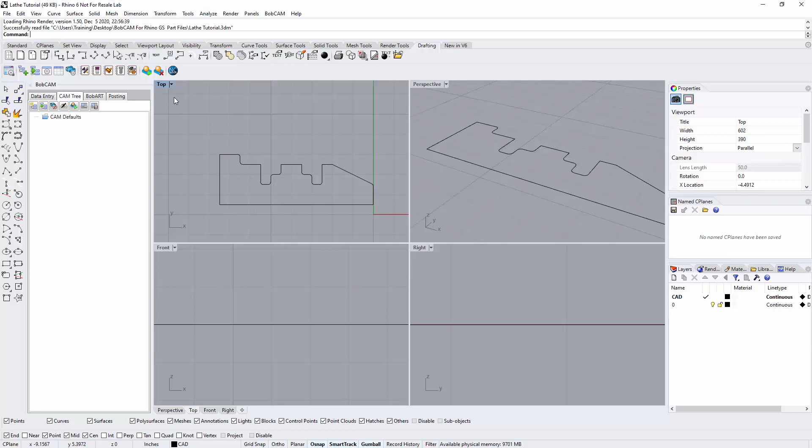The big thing is we really don't need perspective view, front, or right. So I'm just going to go to the top view so I can focus on just that view.

Now to get started, I'm going to right-click on CAM defaults here and go down to New Job, and then I'm going to choose Turning. When I choose Turning, it's going to give me a lathe, and you may have more than one lathe available. I'm going to use this BC2X lathe, but really all the lathes are the same. The most important thing is that you have the right post processor for your lathe. So you can use the BC2X lathe with a Haas post or an Okuma or whatever you got. You can actually use them together and it'll work out just fine.

Now from here, I'm going to go right into the stock wizard. I can pick my geometry if I had a solid model for my workpiece, but I don't have a solid model, so I'm just going to ignore that and go past it.

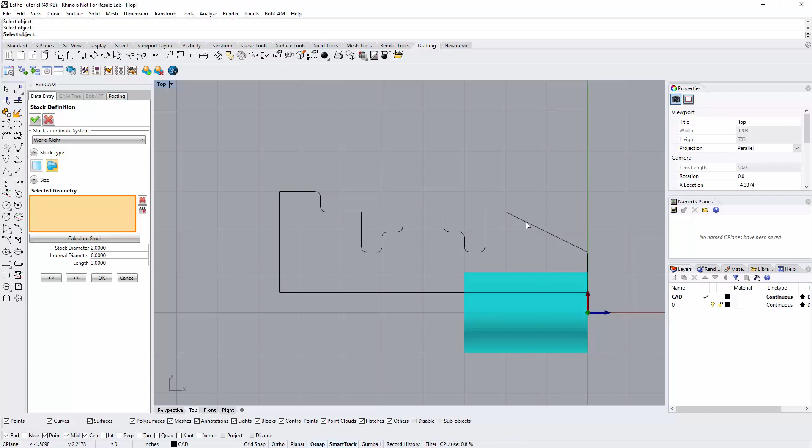And then right here, I create my stock. Now we have two types of stock that we can select when we're doing a turning job: cylindrical stock, or revolved stock, which means I go in and actually pick geometry and tell it to revolve that stock.

Now in this case, I'm going to go with a cylindrical piece of stock, and I'm going to define it to the size of a stock diameter that is 6 inches. We have an internal diameter at 0 because I don't have a hole through the stock. The total length of it's going to be 8 inches.

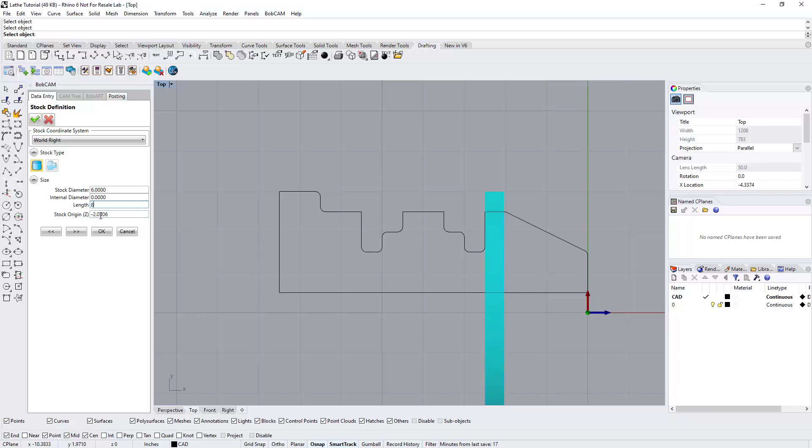And because I used the revolve a second ago, it's thinking that the front face of the part is here. So I'm going to set my stock origin at just 0.1. This is going to leave me some geometry in front of the material that I'm going to be able to face off with a quick face pass.

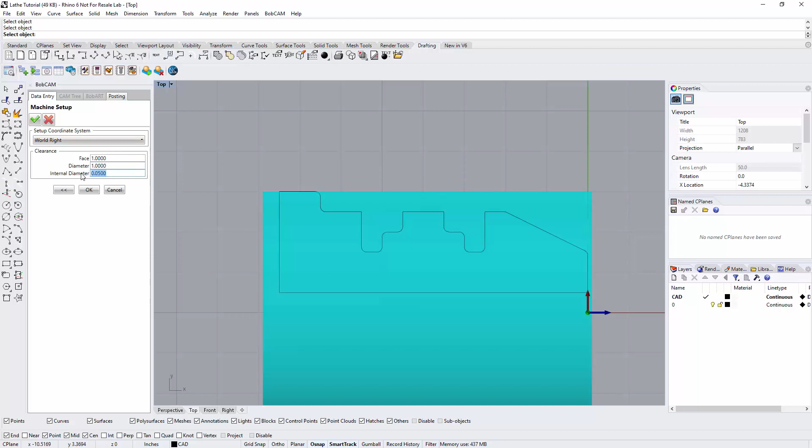Now when I hit next, I then have my clearance planes. There's no other origin. The origin defaults to right here. So I have my face at 1 inch, so it's going to stay 1 inch in front of the part when we wrap it around. It's going to stay 1 inch off the diameter. And then if I had an ID, it would be at 50 thou. But in my case, I'll just hit OK.

And then I'm going to go ahead and blank out my stock. Now, before I start toolpathing this, I want to go in and load in the tool crib because I have a couple tools in here that are kind of custom made. They're a little bit longer to be able to do some of these grooves.

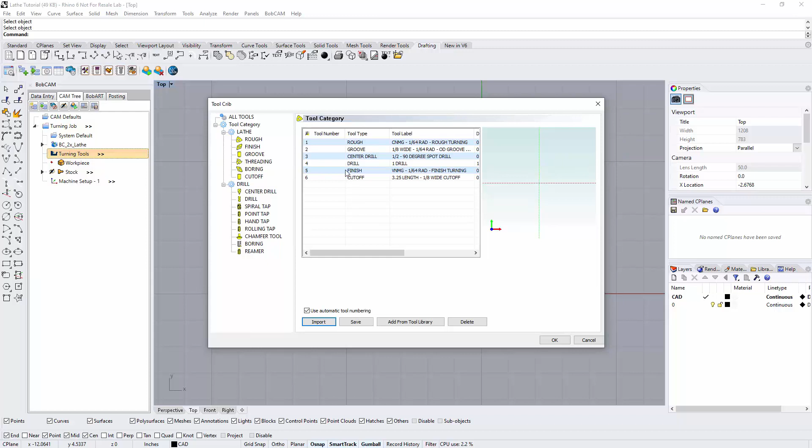So I'm just going to right click on turning tools and say tool crib. And then down here, I'm going to import my tool crib from right here, the lathe tool crib, LAT cribs is what it's called. So we'll say open. And then there's the 6 tools I plan on running. And the big thing I changed here is on my grooving tool, we have it sticking out a little bit further to be able to go in and make those cuts. So I'll go ahead and hit OK.

And then I'm going to right click on machine setup 1 and do a lathe end face. So from here, I'll just select my geometry. Really, I don't actually have to pick geometry, but I'm just going to pick the front line right there, just that front face line, and then hit OK.

And then go next. Now, if it tries to pick the full chain, remember you can go into the sub-entity picking by holding Control and Shift at the same time.

In this case, I have it not joined together, so it didn't ruin anything. Right here I have my rapid plane, so it's going to be 200 thousandths in front of the front face of the part. It's a front face type cut for the feature, and I'm doing region 1. If you go region 2, you're going to start from the center and move away. I want to start from the OD and move to the ID.

Right here I could tell it whether to go from a stock amount. So what's the stock? Do we want it to read the stock and cut it, or do we want to just go with a custom amount where I can define that? And then right here we have some extensions, so how far above the part do I want to start?

I'll give it a little 1/8 inch there. And then how far past center do we want to go? I'll give it a 1/16 of an inch right there, so just 0.0625. That should give us enough to get rid of the little tit that's going to be left at the tip of the part.

So right here I'll say next. Right here's my machining strategy, and the strategy for this is either an end face rough or an end face rough with a finish pass. The finish pass would just be used to clean up any excess. I'm not going to do a finish pass, I'll just go with the end face rough.

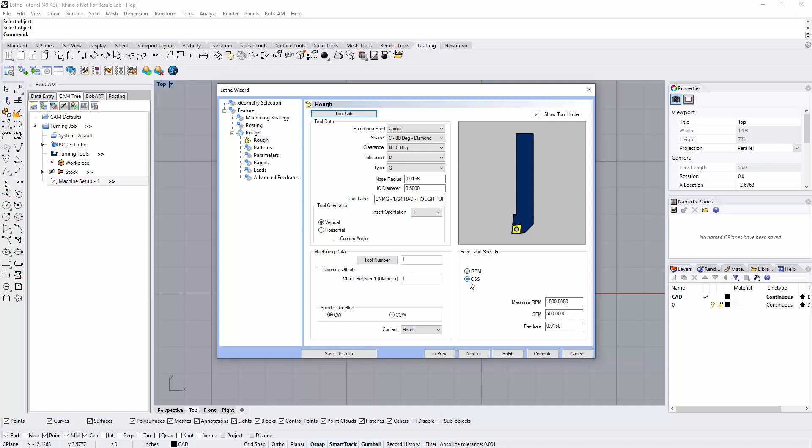I do choose between clockwise or counterclockwise. I have my coolant of flood, mist, air, oil, or off. And then right here for feeds and speeds, we could either set it up with an RPM or a constant surface speed. So I'm going to leave it on constant surface speed and then hit next.

Right here's my pattern, so how do I cut this part? Either I do a standard cut, and we just start at the beginning of the cut. In this case it's a face, so it's just going to cut its way down, go back, cut again.

We could also do a zigzag with that option, so it actually zigs its way in. Not something I've used much on really anything, but especially not facing.

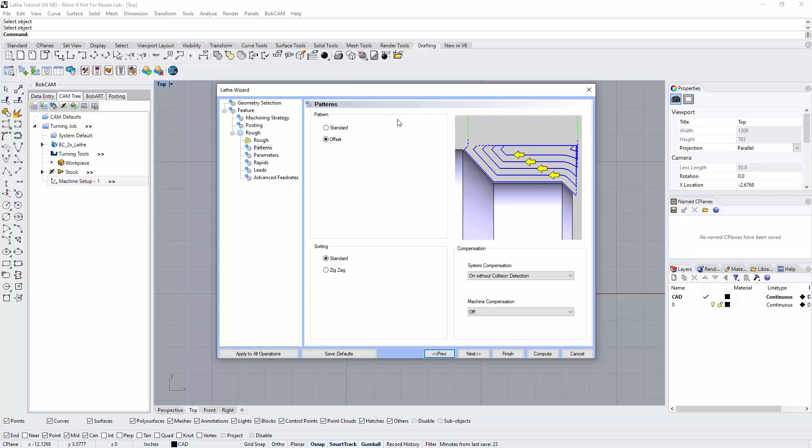And then the other option is offset, so we basically follow the shape of the geometry as we cut the geometry out. I'm going to go with a pretty standard one and just say standard with a standard sort.

And then right here we have our compensation. Now, if you're defining your tools properly and you're defining the correct holder, you can go in and say on with collision detection, use the tool holder. This will ensure that we don't drag the holder across an area on the part that can't be cut with that holder.

If you're not using the on-with-collision-detection option using the tool holder, you're primarily going to be using a G41 or G42 so that you can offset your tool manually. For me, it's pretty much always going to be on with collision detection using the tool holder.

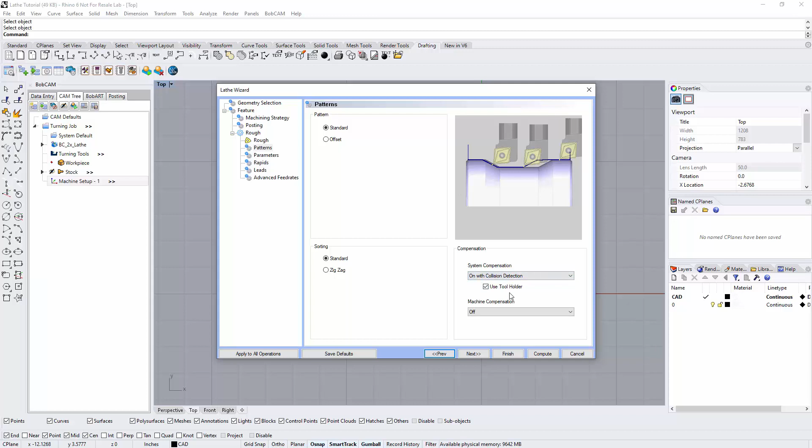Next, I have my parameters. How much am I taking off in my depth of cut? How much am I leaving for my allowance? For my depth of cut, I'll say 50 thou, but I don't want to leave any allowance. So I'm going to put these both at 0 so that with this one rough pass, I can finish the entire front face. Here we have options for overlapping, which don't really come into facing too much.

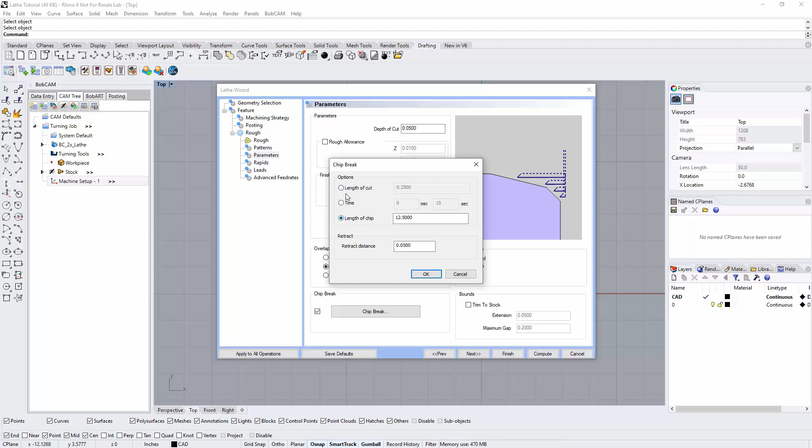These will pop up more when we get into the turn rough and turn finish. So I'm just going to leave it on no overlap. Here we have our chip break options, where we could tell it our length of cut before the chip break, tell it the time, or tell it the length of the chip, and it's just going to retract the tool and break the chip. So I'm not going to do any chip breaking right now.

We have our corner types here, which again a lot of these options you get in both face, but you'll also get them inside the turning. So when we're actually roughing the OD, these will come in handy more than with a face cut, but you can choose whether you want a round interpolation of your corner or a sharp interpolation of your corner. I'm going to go ahead and leave it on round.

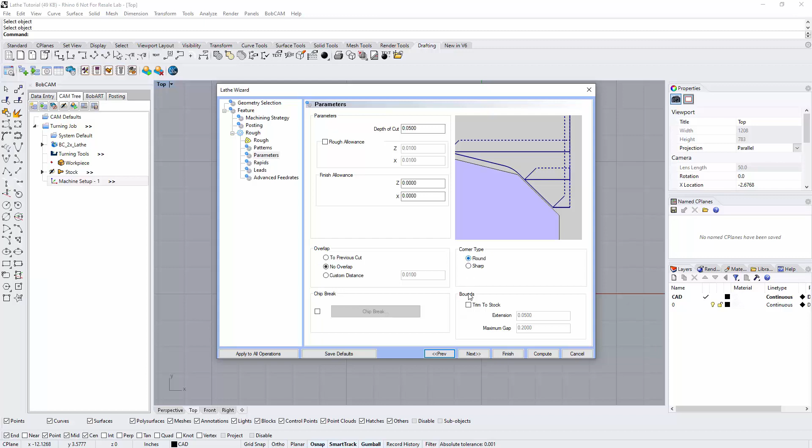There's also an option for trim to stock, and this is helpful if you've already roughed some material out and you don't want the tool path to go into areas that have already been cut. You can create a model that represents what's been cut and what hasn't, and use it as a trim to stock option. But in my case, this is the first cut we're doing, so I'll go next.

Here's our rapids. You have a default rapid on your approach, which is primarily what I use, especially with a part like this where it's all pretty much OD work. I'll just say use a default rapid on the approach and a default rapid on the exit.

But you do have different situations. You could say I want to start from the OD, ID, or face clearances, or you can rapid from a defined point. When you see values that say X-Z, it means X then Z is going to move, or Z then X. But with ones that don't have a dash, it's an angle there, so it's just going to be an angle straight in. So if you can't do that, don't do that.

Like I said, with most approaches, the default rapid on the approach works pretty good. The default rapid on exit is kind of the same thing—you're just going to tell it where to go. So you set up a tool home, a cycle start, or a defined point. Again, same thing with X-Z meaning X then Z. You really have to be careful with that when you're doing ID cuts, to make sure you don't take off in the X direction and run through your part before coming out.

So just make sure, most of the time, try and start it with the default rapid on exit, set your home position, and hit compute. If you see a problem, then go and change it. But most of the time the defaults do a pretty good job.

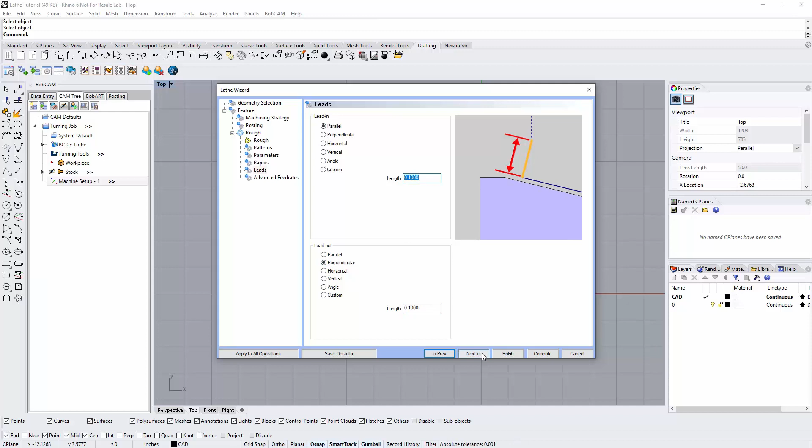Finally, we get to the advanced feeds, and this is where we can convert rapids to feeds, meaning we take G00s out of the program and replace them with G01 moves, and that's going to allow us to output a feed rate for when we're doing those G01 moves.

So it's to help with an issue called dogleg rapiding. If you've heard of it before, you may need it, but most of the time you're pretty safe. Right here you have percentages of your feed rate being used when you're doing a lead in or a lead out. When we're all done and can't hit next, we'll just hit compute and let it calculate.

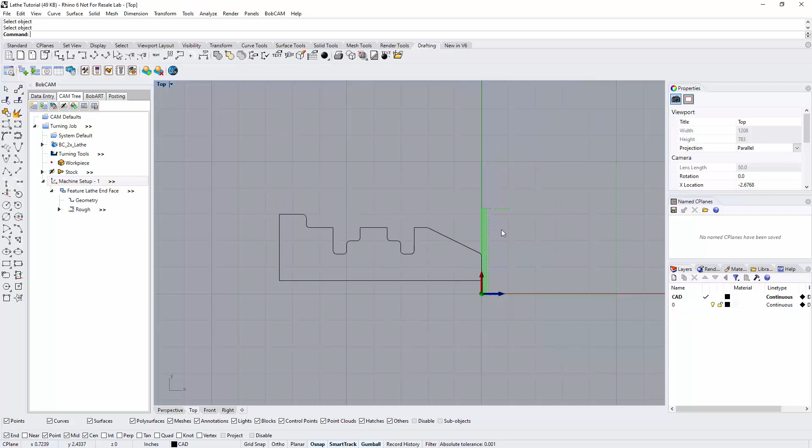And there is our toolpath right there, our front face path. So now I'm just going to right click on my feature lathe end face and say blank unblank toolpath. And then I'm going to go ahead and move on to the hole down the center.

I'm going to drill the hole out of the center first. So I'm just going to right click on machine setup 1. I'm going to go to lathe hole. And then I can go and select my geometry.

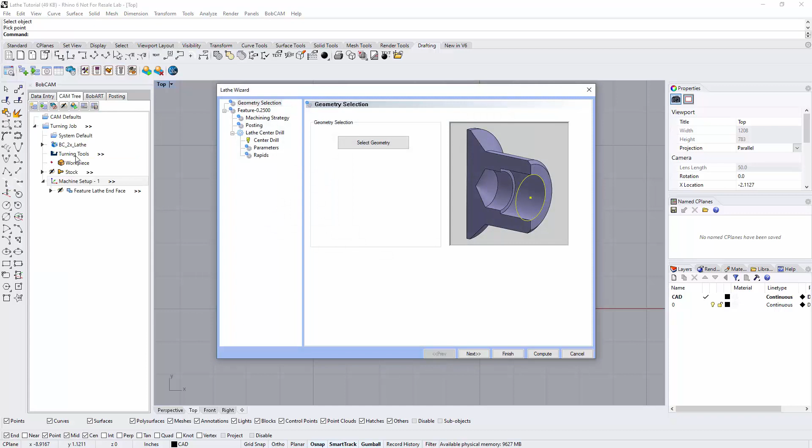So when I say select geometry, all I need to really define is where the drill is going to drill to. So I'm going to pick this back point of this line right here and then hit OK. And I can actually adjust that as I do this. It's a lathe drill, so it can only go right down the center. So I'll go ahead and say next.

Right here we have our feature, so we're going to have to define all of this. We have our clearance plane in front of the part, so 1 inch. Our rapid plane, I'm fine with 200 thousandths. Feed plane, 100 thousandths, I'm good with that.

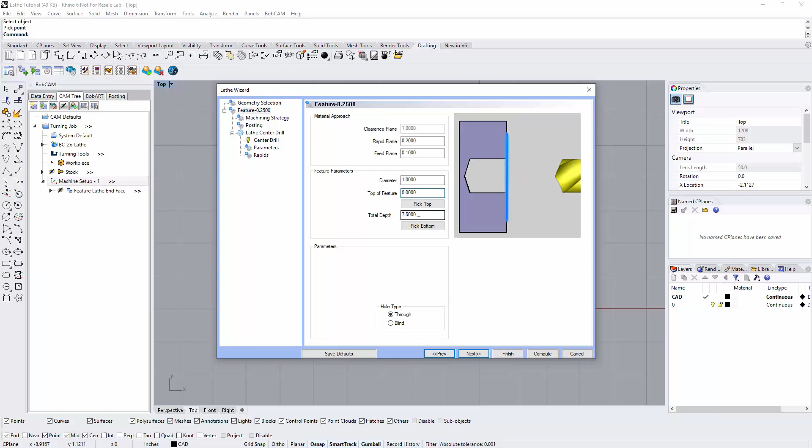The diameter of the cut is 1 inch. The top of feature is at 0. The total depth that it's going to go is 7.5 inches. And then right now I have it set up as a through hole, so it's going to add 50 thousandths onto this 7.5. So it'll be 7.55 by the end of this.

Next, I then have my machining strategy. I'll choose the lathe holes feature, which will give me a center drill and a drill. Next, again, I have my posting, so we could do separate moves or canned cycles, all depending on what your machine has and what your post has had worked out. And then right here, I have my center drill.

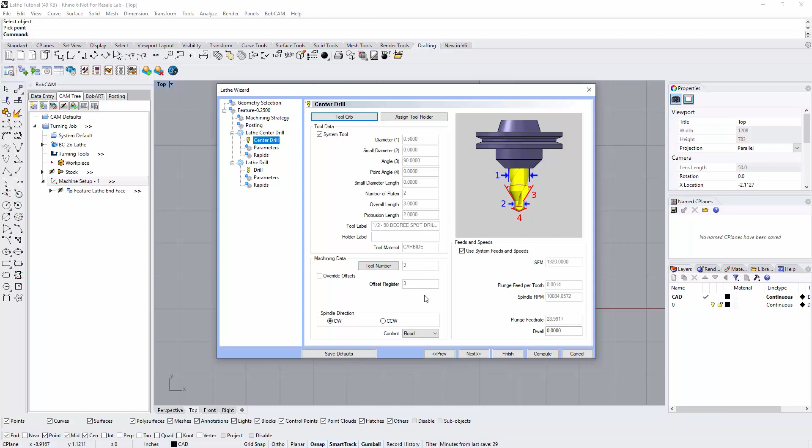It's a 1/2 inch, 90-degree spot drill. It's part of my tool crib. So I'll go next again. Right here for the parameters, we get to set up our depth of cut and our center diameter. So I'm just going to set this to 0.2 for the diameter, so it goes 100 thousandths deep. And then I'll just tell it to do that with a single step.

Next, I have my rapids. Again, I'm going to use the default rapid on both the approach and the exit because most of the time when we're doing OD kind of cuts, exterior cuts, we really don't have to worry about that. So we'll go next again. For the drill, I have my 1 inch drill. And so I'll say next again.

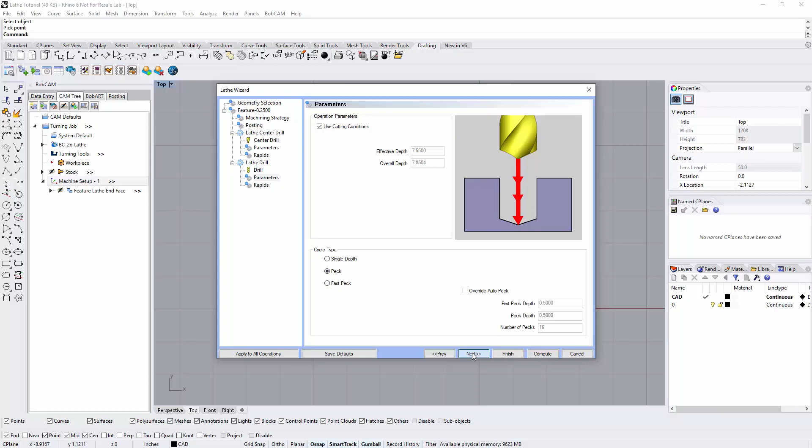Right here, we'll see that the overall depth is 7.8504, and you'll see that the effective depth where we're getting the full cut is going to be that 7.55, that added 50 thousandths. Now I am going to go ahead and peck this one out, and I'll just say next again. And right here we have our rapids, so I'm going to use my default rapid approach and my default rapid on exit. So I'm going to hit compute, and there is my drill down the center of the job there. So then I can blank that one out as well.

The next step is going to be turning from the front radius here all the way to the back of the part. So I'm going to right click on machine setup 1, and I'm going to go down to lathe turning. From here, I'll say select geometry.

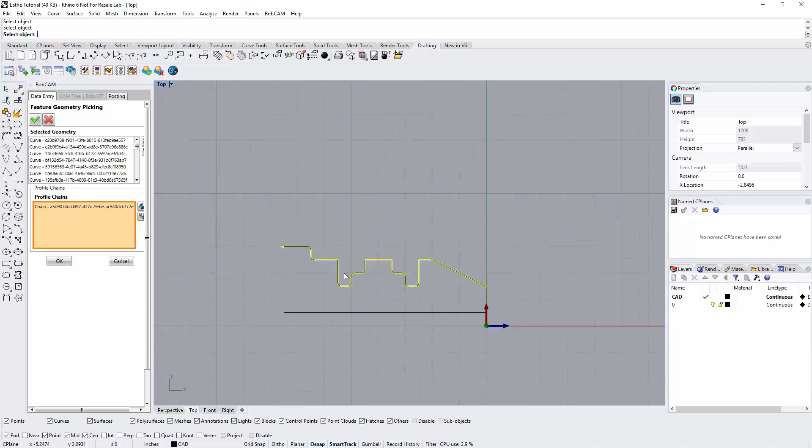And I'm just going to drag a box over all of this geometry right here so it grabs it. Whatever you can select inside the box will get grabbed. And then I'm just going to add in the extra pieces right here just by clicking on them. And then right here, I could click on my chain and we can see it's going to start at the front face here and go back to the back edge. So that's perfect. I'll then hit OK. Now, after hitting OK, I could just go next.

And then right here we have our rapid plane, so we're going to be 200 thousandths above the OD when we wrap it around. We're telling it that it's an OD cut and that we're using region 1, so basically we're starting at the front face and moving backwards. If we go to region 2, it's going to do the back face towards the front. You also have a choice of doing ID cuts. Really what this feature type is doing is it's prepping the tool and the orientation of the tool so that it comes out properly. So I'm going to go OD region 1.

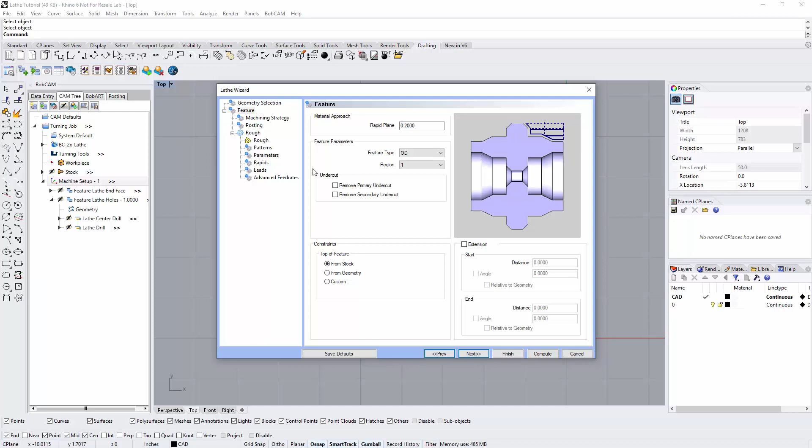And then right here I have some undercuts. Now grooves inside of your turning are seen as undercuts. Primary undercuts are turn grooves, secondary undercuts are face grooves. What these buttons do is they allow us to ignore or remove the geometry that represents the groove. So it takes that out of the geometry, so I don't have to worry about those, or I don't have to worry about adding a line across them to ignore those. So I'm going to say remove both of them. I don't have any secondary or face undercuts, but by turning it on, I'm just ensuring it doesn't run there.

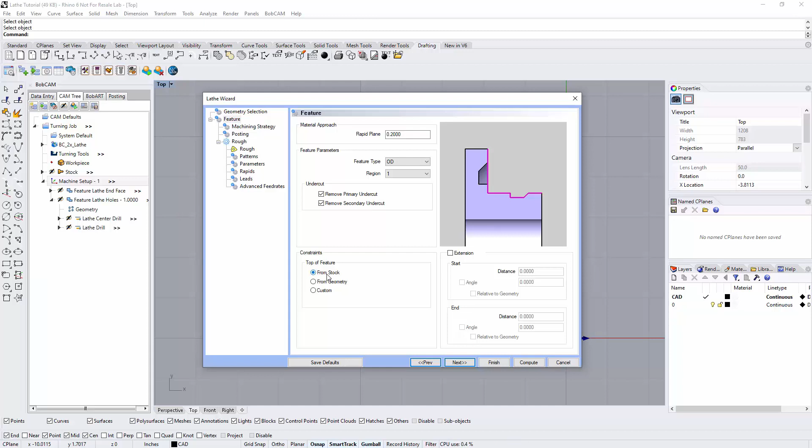And then right here I can tell it where to machine from, so I want to start from the stock, move to the center. So I'll say start from the stock. And then for the extensions, whether or not I add them, I don't think I need them. I'm also going to have a leads page here, so I could add leads to take care of that. But the extensions just allow me to extend either before or after the part when we run it. So I'll go ahead and say next.

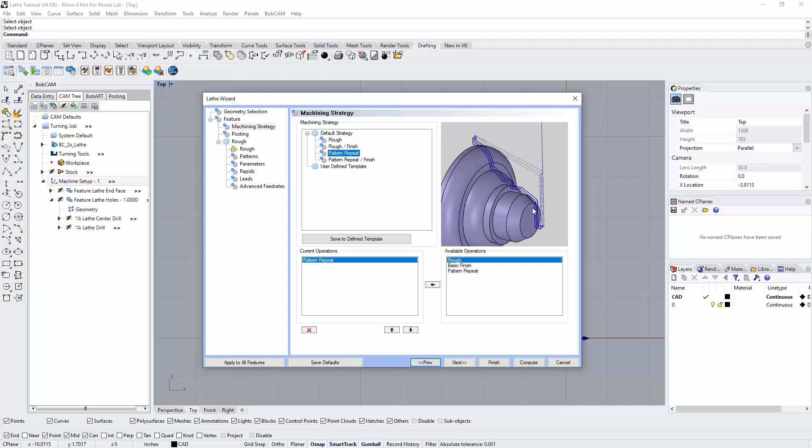Right here's our machining strategy. So we have the choice of doing a rough and a finish, a pattern repeat, or a pattern repeat with a finish pass. I'm going to go with the rough and a finish, but the pattern repeat is essentially just a series of cuts that match the geometry and just kind of step their way in for a finish pass. But I'm going to go with the rough finish here and then go next.

Right here, again, we have our separate moves or canned cycles. I'm going to go with separate moves. And right here we have our roughing tool, so it's a CNMG, the same tool I used when I faced off the part earlier. So I'll just leave it there and say next.

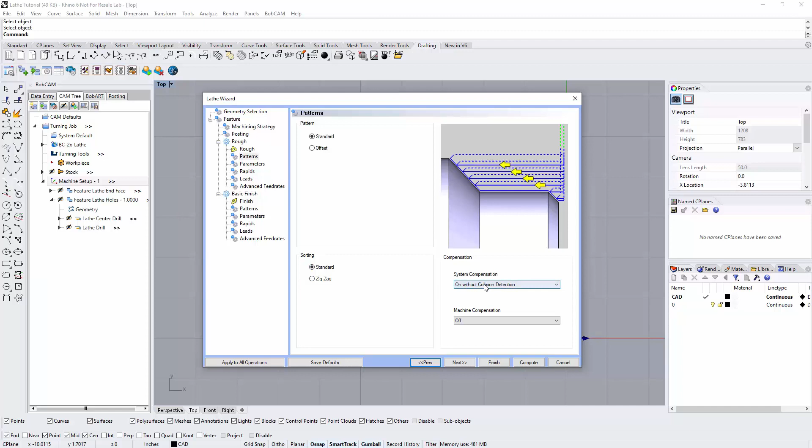Once again, it's the same options we saw with the facing pass for the pattern, so we could go with a standard or an offset, and then we could choose either a standard or a zigzag pattern when we go to machine it. You need the right tooling to be able to do this because you're going to be doing a back drag cut when you're doing your return. So I'm not going to do a zigzag, I'm going to go with standard. And then right here for my compensation, I'm going to turn on with collision detection using the tool holder.

Next again. Right here we have our depth of cut, and I'll leave that at 50 thousandths. I'm actually good with it taking that much. But this time we do have a finish pass, so I am going to leave some finish allowance on that part. The rough allowance is kind of an intermediate one. If you were to rough it out and then use some pattern repeats and then a finish pass, you can group them all together. But in this case, I want to rough it, I want to finish it.

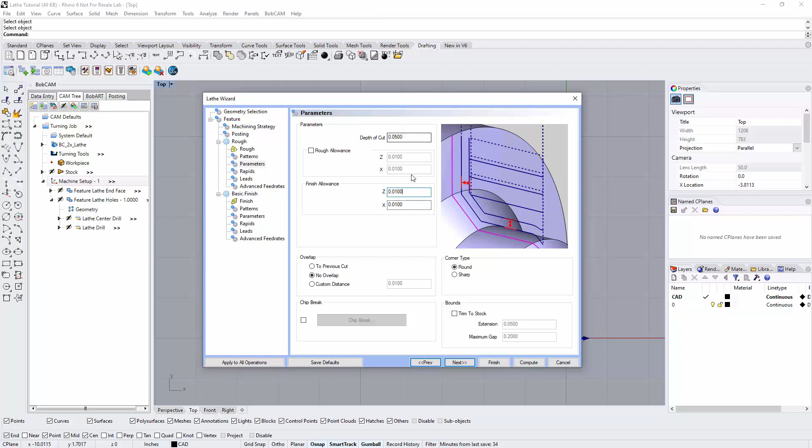And right down here we have our overlaps. So no overlap means that when it gets to its cut, it ends and goes back to the beginning. If you set it up to previous cut, what it'll do is as it leads out, instead of just leading straight out, it actually connects to the previous cut and then leads out, and it just helps smooth the part out as it runs. You could also set up a custom distance that you want it to go instead of going to the previous cut, but I'm going to go to the previous cut.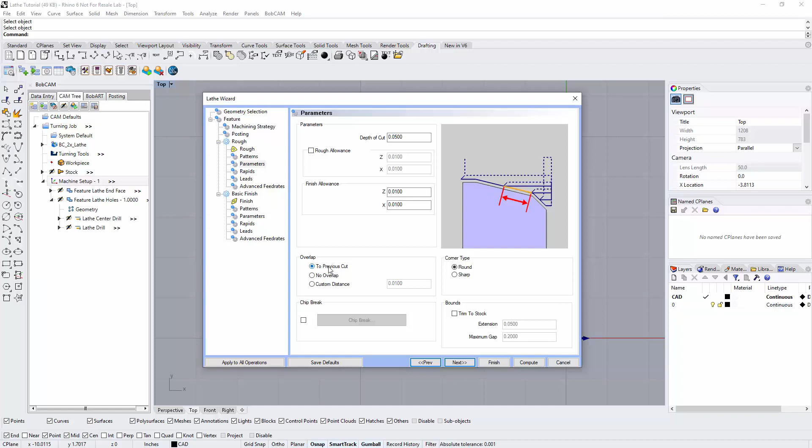I'm not going to mess with any chip breaking on this one. And then right here we have our corner types, either round or sharp. Again, that's just the interpolation of the geometry when you make the cut. And then we have our trim to stock option there.

Next, we then have our rapids. So the rapids, we have a default rapid on the approach and a default rapid on exit. I'm good with that, so I'll go next again.

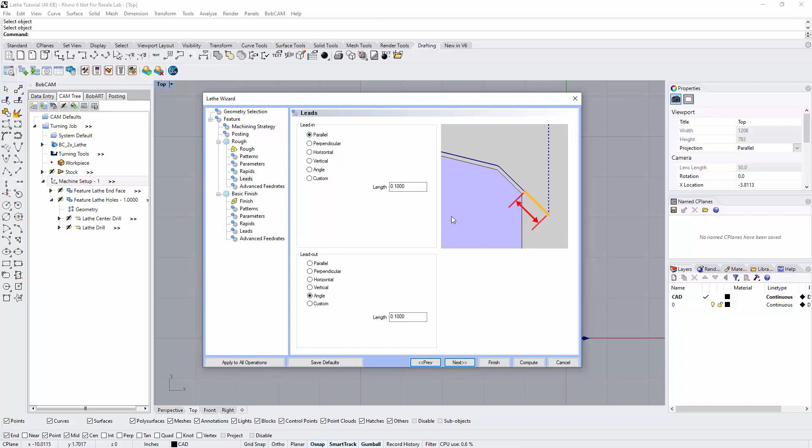Leads, I'll start with a parallel lead in, so it's parallel to where we're cutting, and then just start with an angled lead out. Again, I like to change as little as possible, so if these are potential working options, then I'm going to leave them. Because if they work, I don't have to worry about changing them. If they don't work, I got to change them. So for now, I'll leave those there as the defaults.

Right here's my advanced feed, so I can convert my rapids to feeds and then change my lead in and lead out feed rate percentages. Essentially, this is the same exact toolpath as what we would have seen when we set up the facing pass. It's just the facing was oriented to cut the face. This one knows to cut the turn. So I'll go next right here.

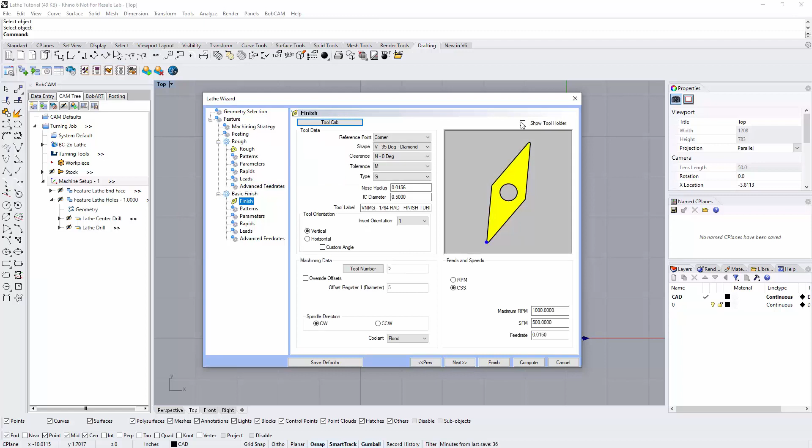Here's our finish tool. It is a VNMG. Again, this is one that I set up inside the tool crib. So I'll go ahead and say next.

For the patterns on this one, we could either do a continuous cut where we start from the front face and just go all the way back, or we could do an alternate cut where we face the vertical areas only, we turn the diameters only, or we do both. So we turn the diameters and we do a face for the verticals, so it's going to cut it down. But I'm going to go with just continuous and say on with collision detection using the tool holder.

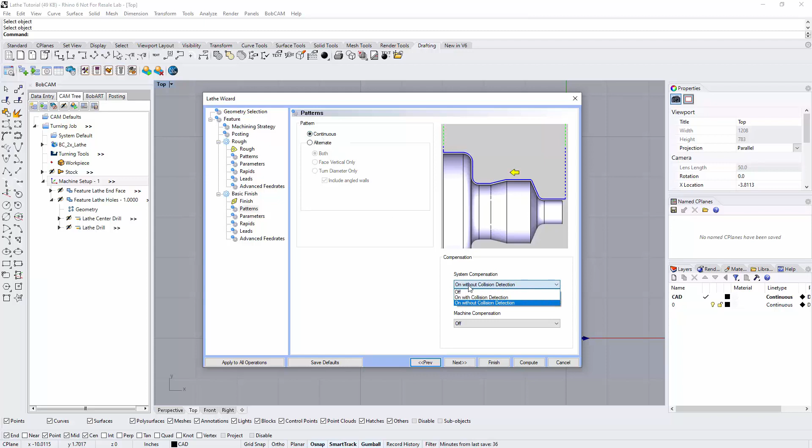Next again, we have our parameters, no allowance because this is a finish pass. Next again, we're not going to change the rapids. Again, use the default leads if we can. And finally, we have our advanced feed rates. And when we can't hit next anymore, we hit compute.

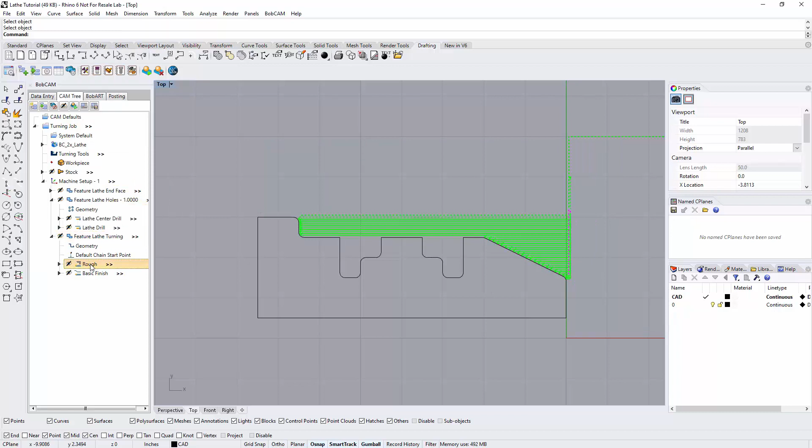Now, after the toolpath finishes calculating, what I like to do is blank it out. So I can blank the whole thing out, and then I could go in and see the actual toolpath. Here's all the roughing, and here's my basic finish right there. So it's taking it all down. We'll see it's ignoring those grooves completely. And then I'm just going to go ahead and shrink this up.

So the next thing we're going to do is these two grooves that we have right in here, and then a cutoff. So I'll right-click on Machine Setup 1. I'm going to go down to Lathe Groove, and then I'm going to select my geometry.

Now the geometry for this is just going to be all of the lines for that. So I'm going to drag a box over pretty much everything right here, and then I'm going to deselect the things I don't want. So that and that. From here, I just look at my chains, make sure they're going from start to finish, from the front face back, and that's fine. And then I'll hit OK.

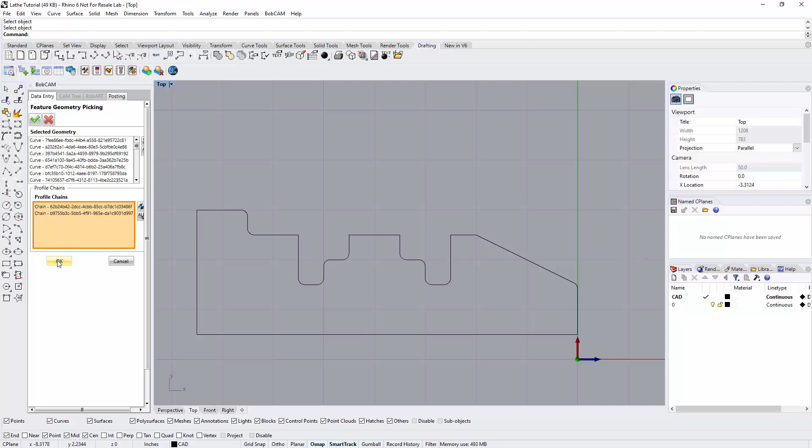Go next again. Right here we have our choices. So I have my rapid plane, my feature type, whether it's an OD or ID groove, whether I'm doing region 1 or region 2, so kind of depending on where I'm coming from, how it's orienting the tool. If I have angled grooves on here, I can have a tool that matches the angle, and I can actually set it to rotate that angle.

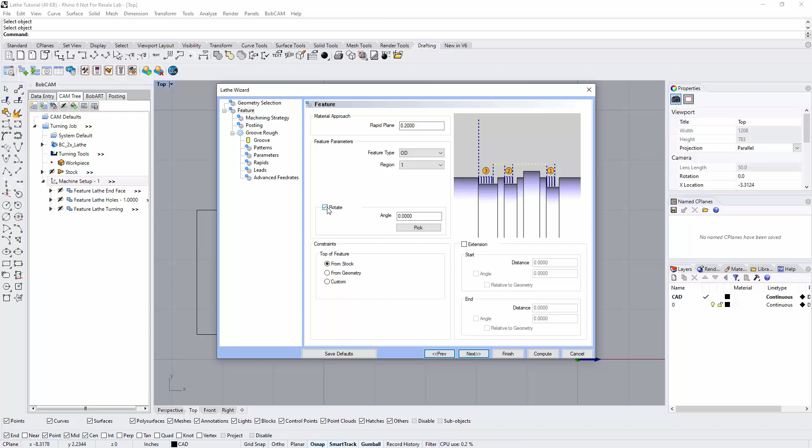And then right here we have our constraints. So I could say go from the stock, so it's going to go from where the stock was, but you got to think we've removed all that stock now. We could say go from geometry, which is from the top of the geometry, from the highest point in, or we could set up custom. So I'm going to say from geometry, no extensions, next.

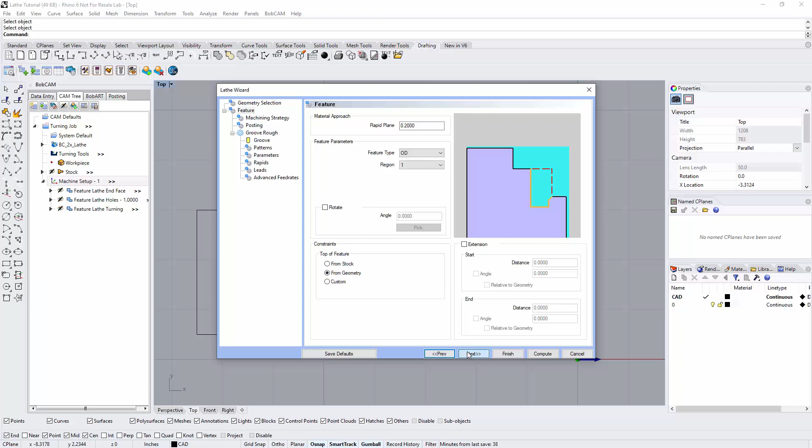Right here we choose a groove, rough, and a finish. I'm going to use the same tool, but I want both of them. So I'll go next. Separate moves or canned cycles, and then the groove. So this is my grooving tool, and I'm hoping this is long enough. I may need to adjust the stick out on this tool, which we can handle after this. We'll see what the results look like.

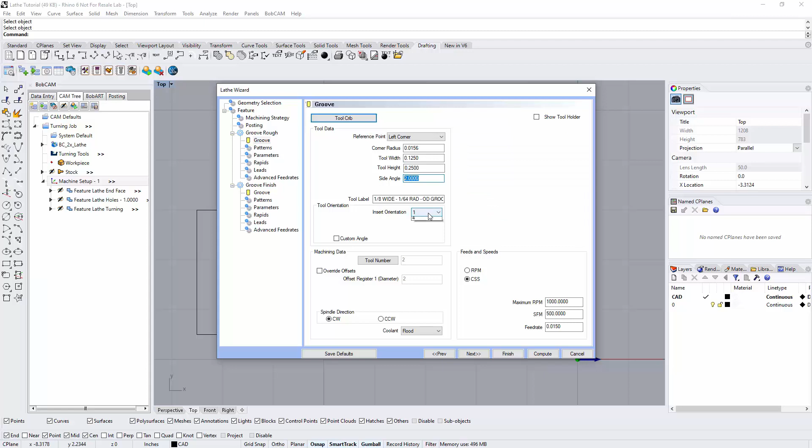But we have our left corner for our reference point, and that's referencing everything off there. We have our corner radius, tool width, tool height, side angle, tool label there. The insert orientation, again, just the orientation of how that holder is sitting. We could set up a custom angle. We've got our tool number, spindle direction, and feeds and speeds.

So when we get into the groove patterns, we have 3 patterns, either a standard pattern, and with standard, you get a choice of sorting either standard, so you just go in order, 1, 2, 3, 4, 5. You could go from the center out, so you do half of it and then come back and cut the other half. We can alternate that, or we can actually skip - so we cut one, skip an area, cut the next, skip an area, cut the next, and then go back and clean up the areas we skipped.

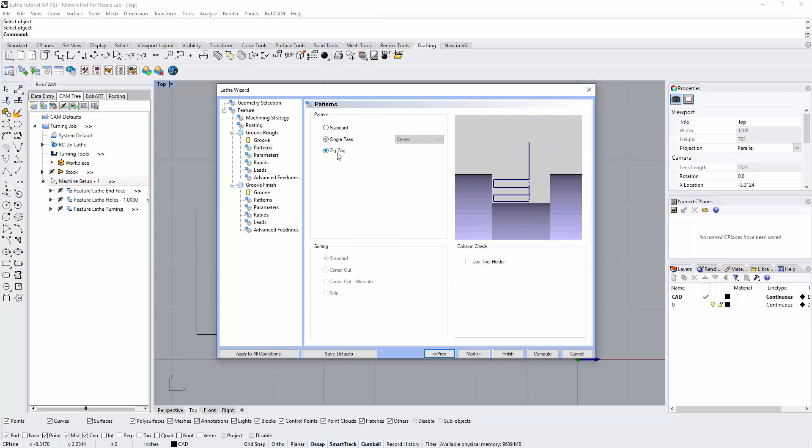We could also do single passes, so that's just if I have a tool that fits a groove, I would just want to press it in and come back out, and we want to base it on either the beginning, the end, or the center of the insert. Or you can cut it with a zigzag, so actually zigzag your way down to the floor.

But I'm going to go with standard. I want to use the tool holder for my collision checking, and this is really helpful for if this holder is too short - it's going to not let it cut into the areas that I'm trying to get into. So it should be able to protect us a little bit in case I didn't change the tool to the correct length. Right here for my parameters, I have my step over amount.

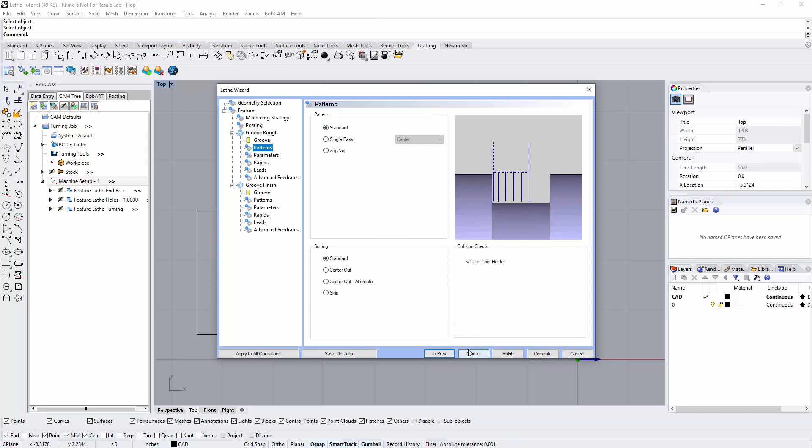So I'm using an 1/8 inch wide tool. I'll just leave it at 50 thou, but really a 1/16 of an inch would probably be fine. The allowance we're leaving for the finish pass, and whether or not we're taking this out in multiple depths - so you can actually step your way in. I'm going to leave it as just depth of cut, no multiple depths. I just wanted to cut to the bottom.

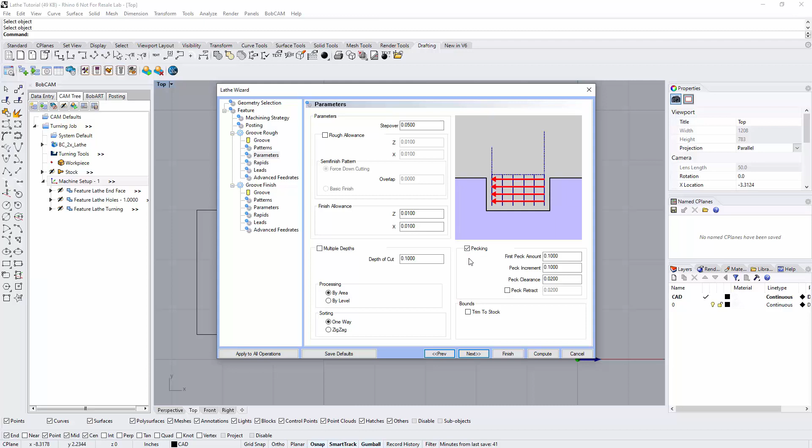We'll process by area. We'll do a one-way sort. And I'm not going to peck, but we can peck by setting up our first peck amount, our peck increment, and our peck clearance, as well as a retract if we want it. And then we do have that trim to stock option, so it knows where the geometry is.

Right here for our rapids, again, it's an OD cut. I'm going to use the defaults. Same with the leads - I really only have one option, which is parallel, so I'll leave that there. And then our advanced feeds - we can convert our rapids to feeds. We also have our lead in and lead out feed rate percentages.

Finally, we get to the groove finish. Should be the same tool - it's tool number 2. That's all good, so I'll go next.

The pattern on this one is force down cutting, so we have everything kind of meeting in the middle of the cut here, plunging in from both sides and cleaning up the groove from both sides. You could even add an overlap amount, or you could do just a basic finish - start on one side and just feed through. So with force down cutting, I'll leave the overlap at 0.

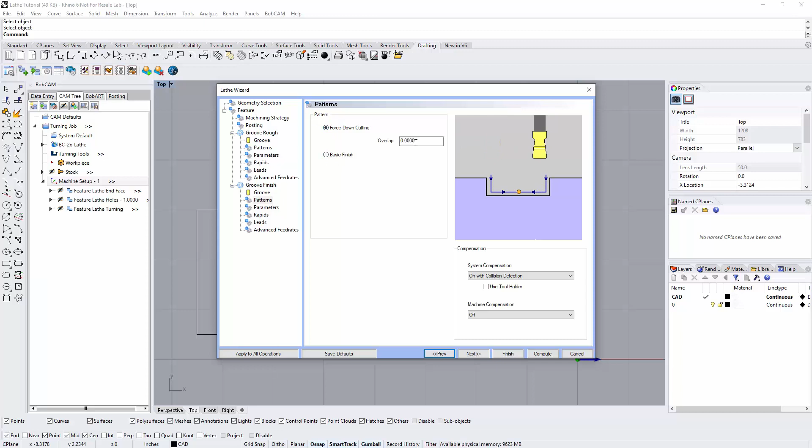On with collision detection, it's one of 2 options in this one. We don't have the 'on without collision detection' like we have when we're turning. We'll just say use the tool holder. Parameters, zeroed out for the finish pass, no chip break, nothing else. Right there we have our rapids, our leads, and the advanced feeds.

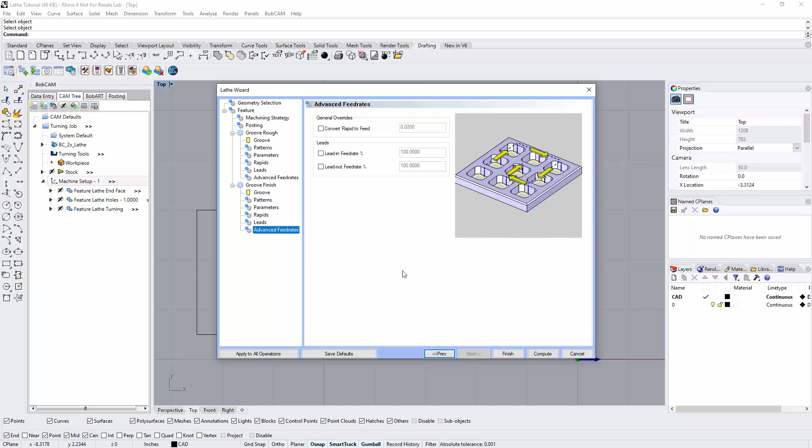So when we're done with this one, when we hit compute, we should get a pretty good idea right away of whether or not it's going to work, because you'll see an angled section in the back of our groove, like right here - it doesn't go all the way down to the bottom. And that's because the holder itself can't physically fit. The way we can look at that is by right-clicking on, say, the groove finish here and saying backplot. And we can see as it steps in, we get down to our depth of cut, and we're kind of maxed out there. So I need to go and fix the tool for this.

The easiest way to do it is to go into my lathe tools. I'll right-click on turning tools, go down to the tool library, and then down to the lathe section. Now inside of Lathe, I can go to Groove.

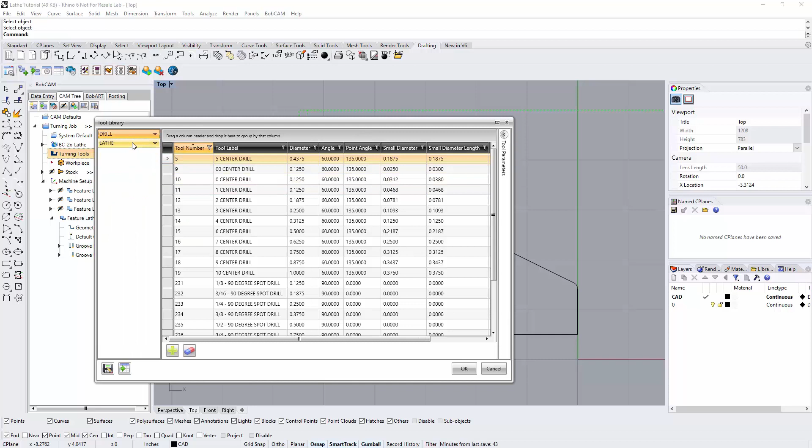I'm just going to create a new tool real fast, open up and add a tool, double click on it, and set it up as the same exact tool as before, just longer. So I'll put this as 1/8 inch wide, OD groove, and longer.

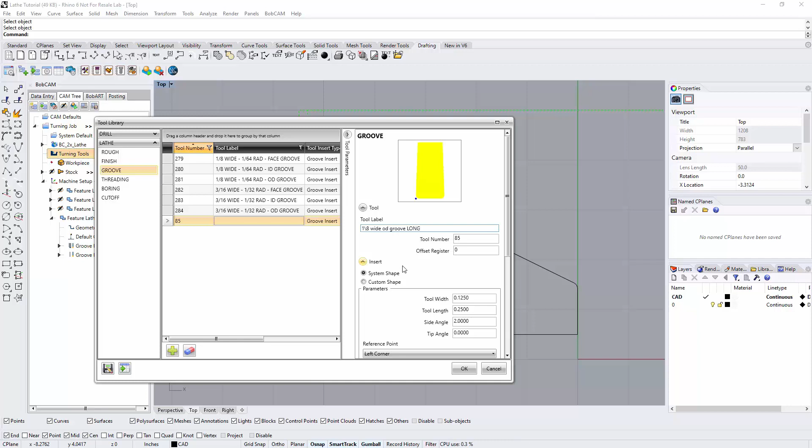I want to make it a separate tool because I don't want to go edit a tool I'm already using. Now I can go to my holder and edit the tool holder. If I click on the image, I can see what updates. This 5/8 length is too short, so I'm going to make this a 1 inch long area. So that's now 1 inch.

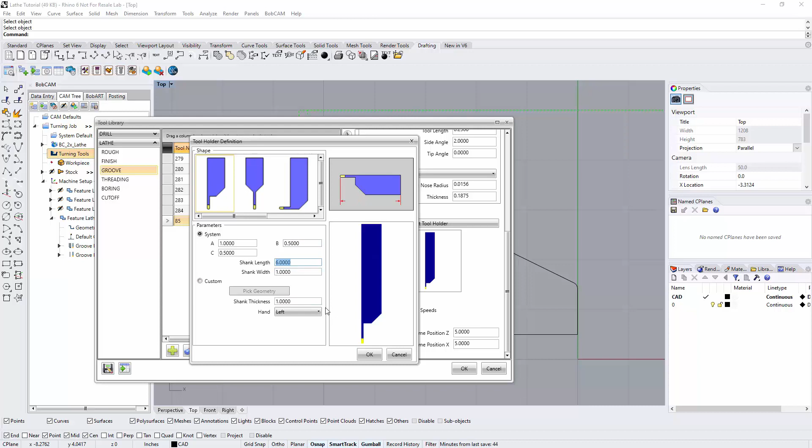If I wanted to, I could even shorten it a little bit to really see how everything's fitting together, but 1 inch should be good enough. I'll hit OK, then OK again, and that's going to add that tool into my library.

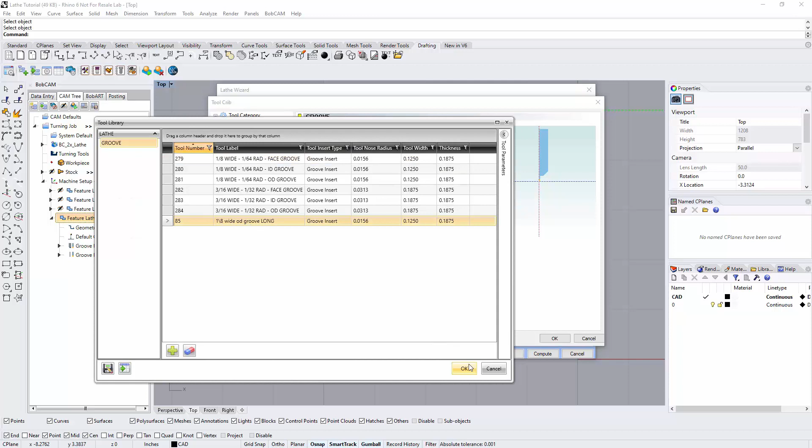Now I could either go into the tool crib and change it, or from the feature, I can edit my feature. I could go to my grooving tool and go to the tool crib directly from here. I'll say add from the tool library, pick my 1/8 inch wide groove that's longer, and hit OK. Now I'll have two tools in here, so I'll hit OK, and that's going to replace it with tool number 85.

Then I'll go to the finish pass. Same thing, go to the groove, choose that same tool, and hit OK. That's all I'm changing. I'll then just hit compute, and we should see this toolpath now go down to the bottom of those grooves. So we'll let this finish.

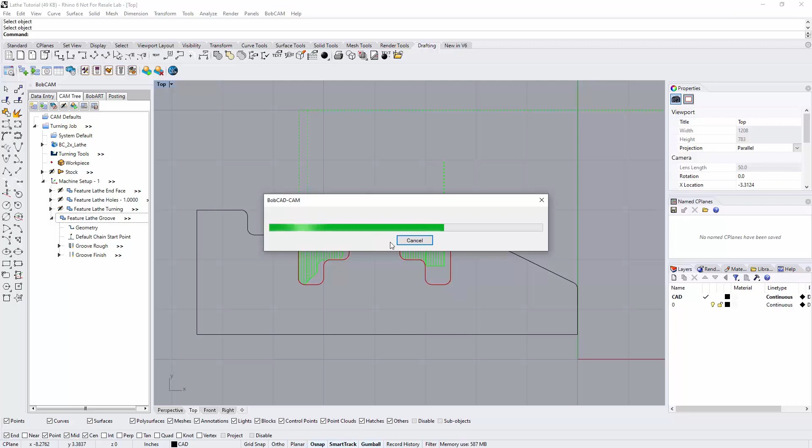And there it is. So now we'll go ahead and blank that out, shrink it up, and then the final pass is doing a cutoff. The cutoff is pretty straightforward, kind of like drilling. We just have to give it a point to cut to.

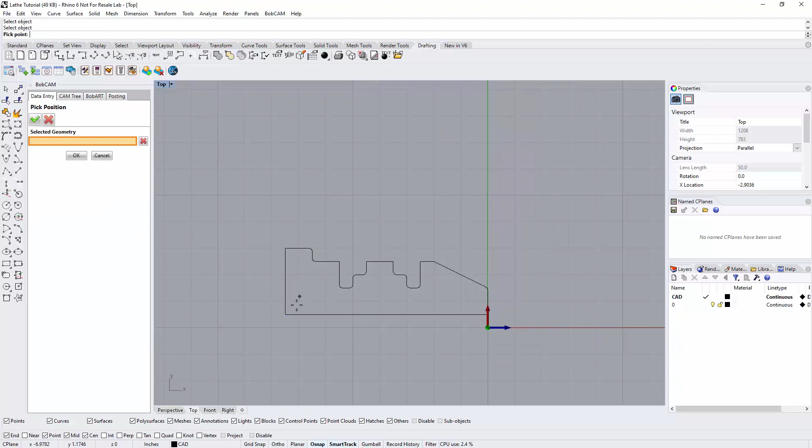I'm going to right click and say Lathe Cutoff. I'll select my geometry. Once again, the back corner of the part works out just fine, so I'll pick it right there and hit OK. That's really just so it reads how deep it needs to cut. I'm going to tell it to start from the stock.

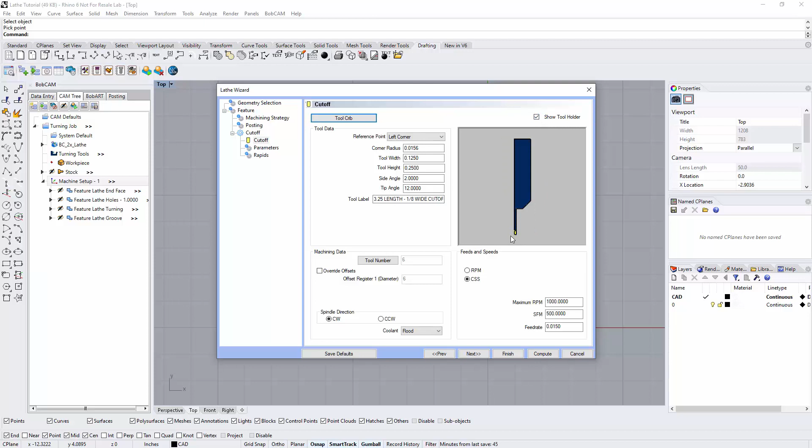Here's our strategy, I just have my cutoff. Here's my posting, separate moves or canned cycles. Here's my cutoff tool, which I already added in, and it's long enough to make the cut. Here's my parameters, so it knows to go back 7.5 inches. It thinks it should only cut off to this

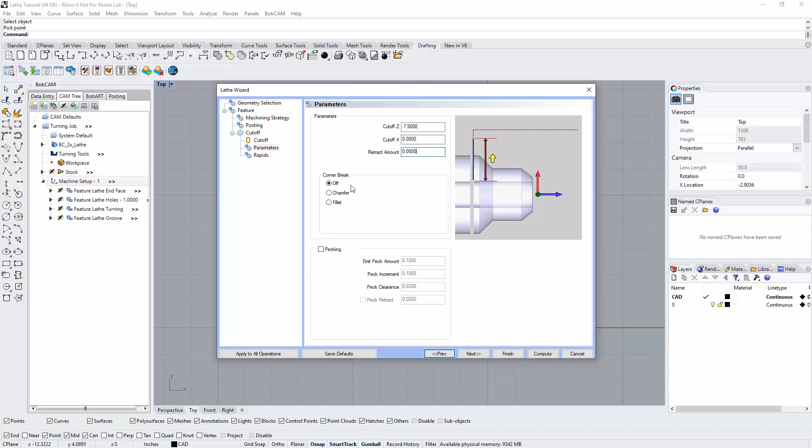0.4993, but really with this, it's going to cut off around 1/2 inch up anyway because there's a hole in the middle. But if I say go to 0, it'll cut off all the way to 0. We also have the ability to go in and add a corner break, so I could have it add a chamfer or a fillet to the back edge without me having to draw that geometry, if that's what I wanted.

And then we can also peck our way in. So there's pecking, I'm going to leave it with all the defaults, 100 thou for the first amount, increment after that's 100 thou. And then we have our clearance, and then finally the rapids. I'm going to use the default rapid on approach and the default rapid on the exit.

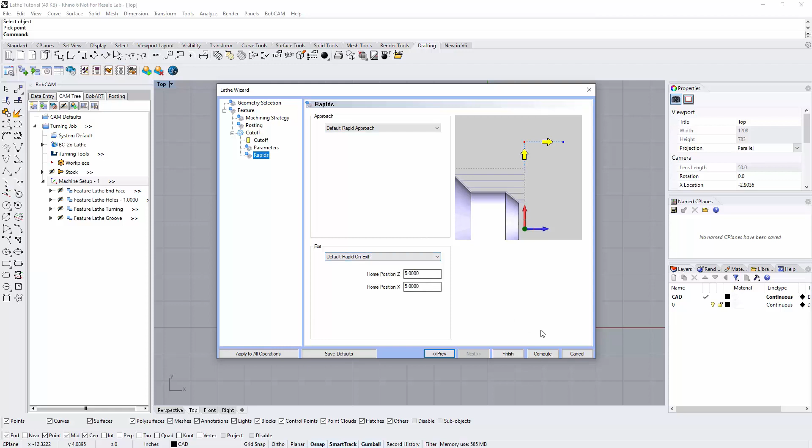When I'm all done, I can hit compute, and there is our cutoff to the center. So what I would recommend after this, I'm not going to go through it, but I'm going to go ahead and start the simulation and watch it run. It should all work pretty decently. Most of our exits are good, and now that we fixed the groove, we really shouldn't have any problems with this part anyway.

And that concludes the video on the Lathe tutorial for BobCAM for Rhino.